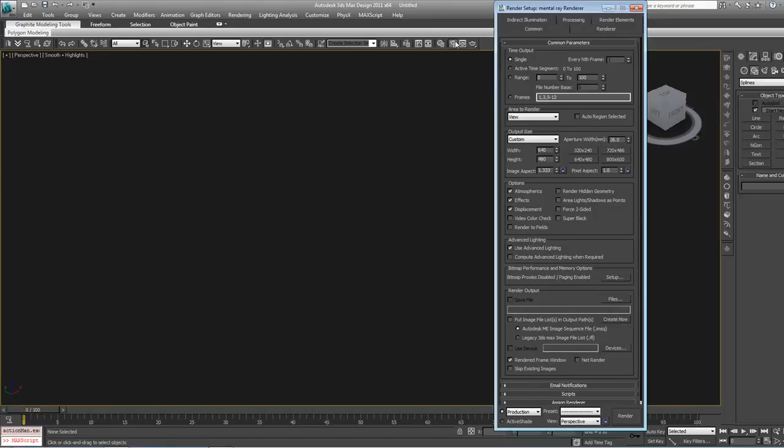One thing we need to do first, depending on your setup, if you already installed V-Ray, your renderer might be set to V-Ray here in the render setup button, assign renderer. For now, let's just make it the default scanline renderer. This comes with Max, so I know everybody has that.

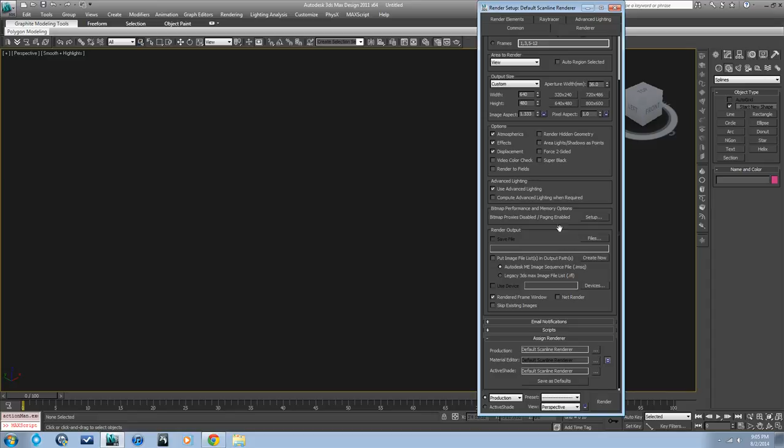For what we're about to do, it really doesn't matter what kind of material we're using. So if you take a standard material, make sure it's set to standard here. You can click on it, and it'll give you all your different options. Standard is the most basic, and again, everyone should have that.

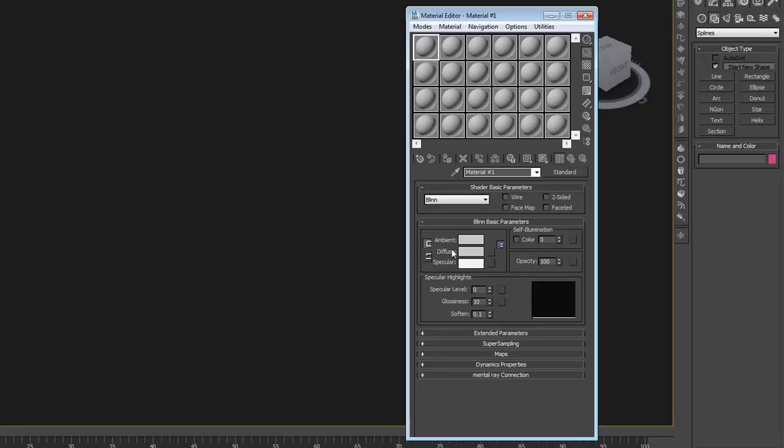Now, I don't want to go into a deep lesson about materials yet because we'll get to that later. But just follow me. In the diffuse slot, click on it, go to Maps, Standard, Bitmap.

I've navigated to the folder where I have my sketch saved. If I just click on it like that, it brings it in. Now if we double click on the material slot, you'll see my sketch there. This is a swatch of our material. By the way, I've saved this sketch with the supplemental materials for this lecture, so you can download it as well and follow right along with me.

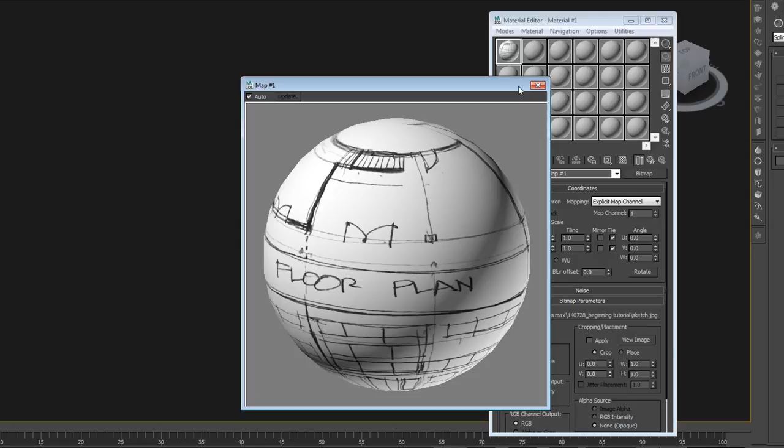Inside this bitmap that I've placed in the diffuse slot, you can view the image like that. Like I said, I drew this pretty quick, not my best sketch ever, clearly. Then we will make sure use real world is off, set it to tiling 1 and 1, and we'll see what that does in just a second. Okay, let's close this for now.

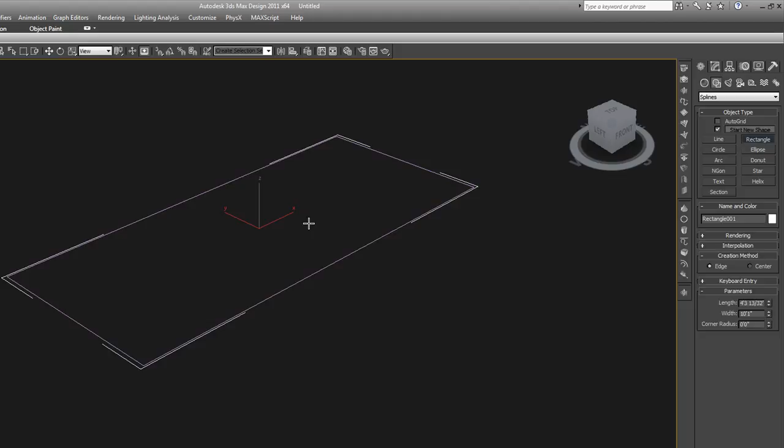Let's draw a little rectangle. And let's right click, convert to edit poly. Is that what we want to do? Yeah, that'll work. Now if we go back into our materials, hit the material editor button on our main toolbar, and with this polygon selected, hit this button here, assign material to selection.

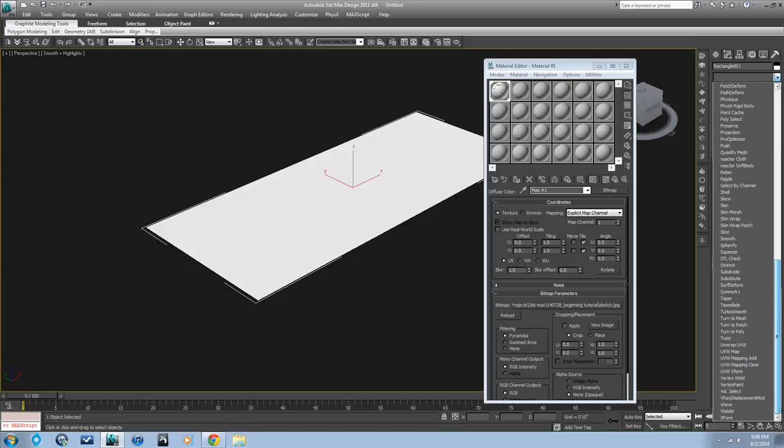Boom. Now also in the bitmap, this is our overall material. We go inside this bitmap here, and if you click this button, show standard map in viewport, that means it'll show up on our object. If we put this material on this object, it'll show this particular bitmap. But we've got to map it first. So let's hit our UVW map modifier, or go up to the modifier list in the modifier tab, UVW map, and now you can see it showing up.

Let's tumble around a bit. Okay, we can close this down and let's go to the top view so we're looking directly at it. As you can see, this looks a little too blurry.

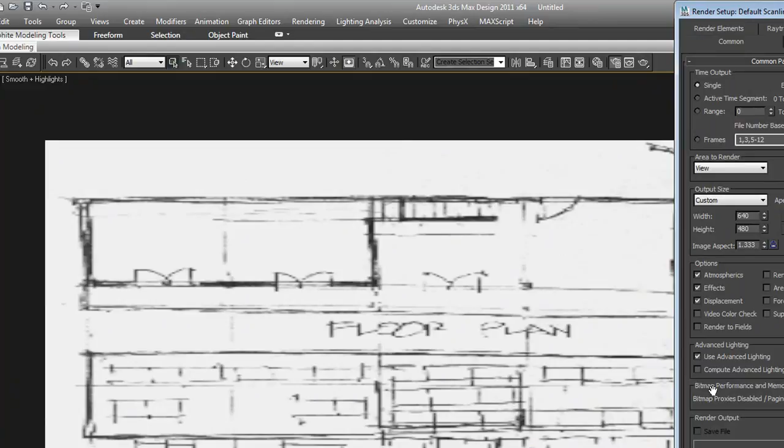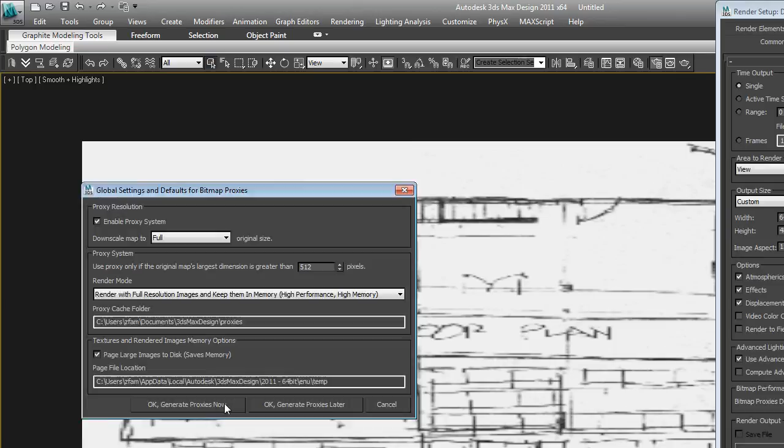So one thing we need to do is go into render setup again, and there's something here called bitmap proxies. If you go to the common tab and go to setup of the bitmap proxies, you can enable the proxy system, make it full of the original size of the bitmap. And then that makes it display at full resolution.

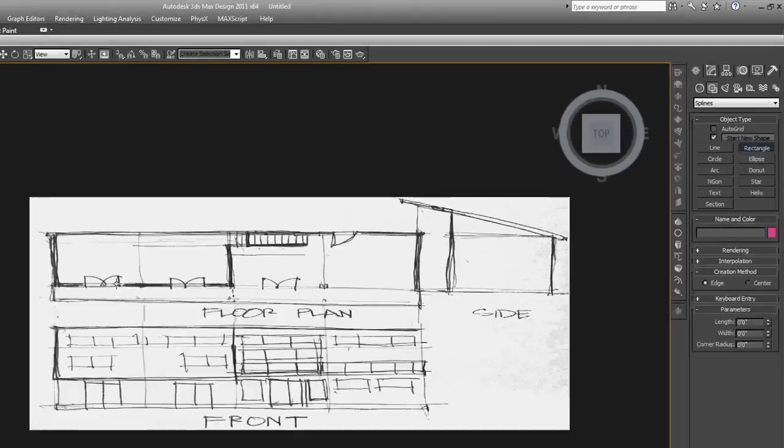Okay, now when you have a sketch like this, you need to make sure that you have something to base your scale on. Since I did this sketch myself, I know that I want each one of these modules of my house—this is the floor plan. Hopefully this will make a little more sense as we go along, because it's not a great sketch, but I did it fast for the purposes of demonstration, and it will show us that you can use almost anything to draw to help as a guide. So I want 20 feet by 20 feet.

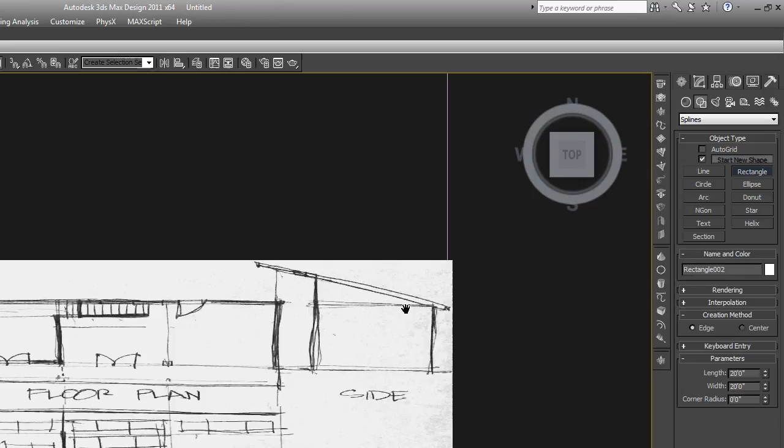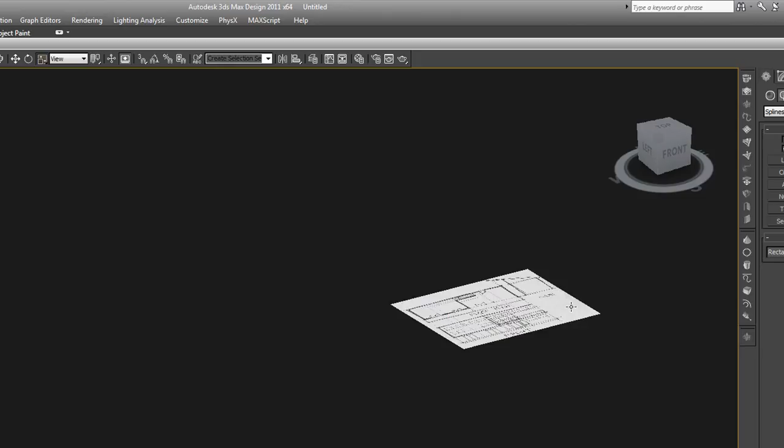Now I can scale this so that one of those sections I have ends up becoming 20 feet by 20 feet. Now, one thing you need to do is make sure that—let's move this down in the z-axis so that my rectangle is in front of it. That way we'll always make sure and see the rectangle. You can kind of see it there.

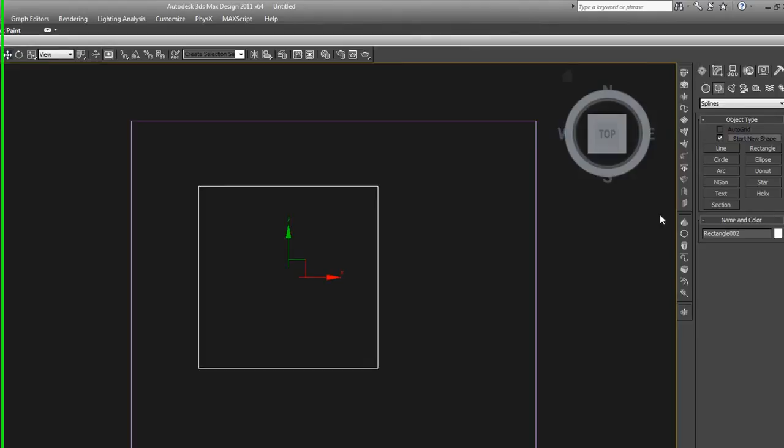And actually, I hit F3 just now to turn off the shading. If I select this rectangle, let's enable it in renderer—just go into the modify tab, enable in renderer, enable in viewport. Let's make it really thick so we can always see it for sure. Now go back into shaded mode, and there you go.

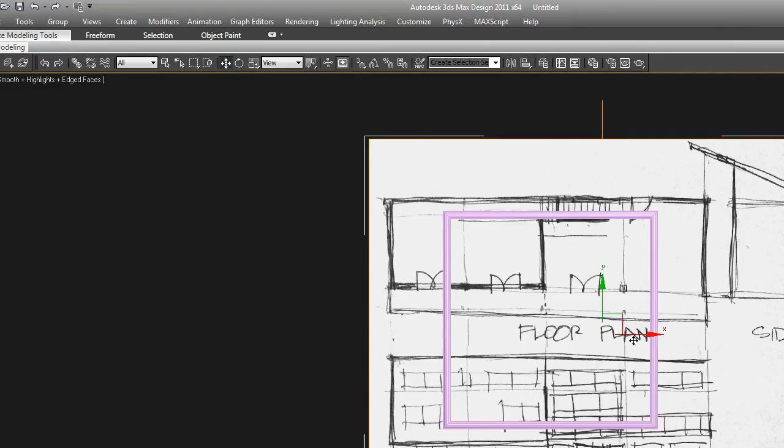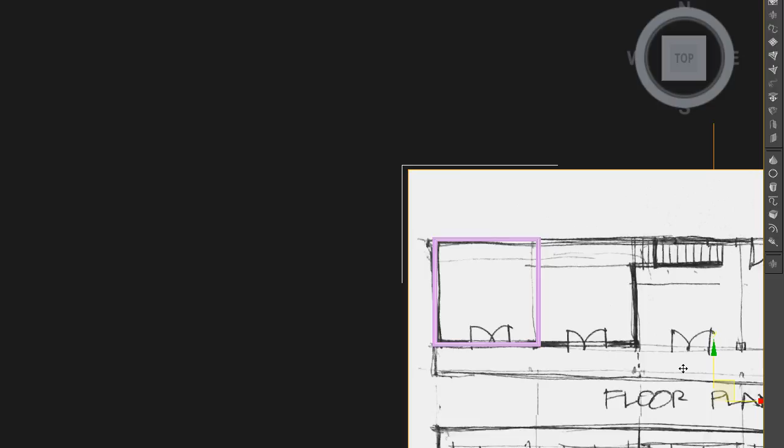Now we move this into place here, and let's just keep scaling it until it fits. One thing we can do here—that's about right there. Now we need to scale it in this direction. That's almost it right there. Okay, so I've got my 20 by 20 squares. So this thing is kind of all scaled now.

Okay, so I now have a floor plan that's to scale. Now, how are we going to get the elevation? Well, we can...

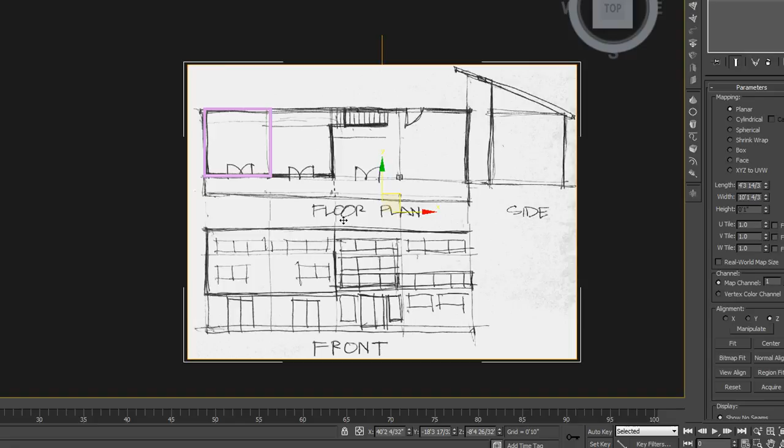One thing we can do, since this is an edit poly, is we can go in. Now, what I want to do here is still show that image with the mapping, even though I'm going to edit the poly. So I can hit show end result on off, which basically applies this modifier even though you're down here in the edit poly.

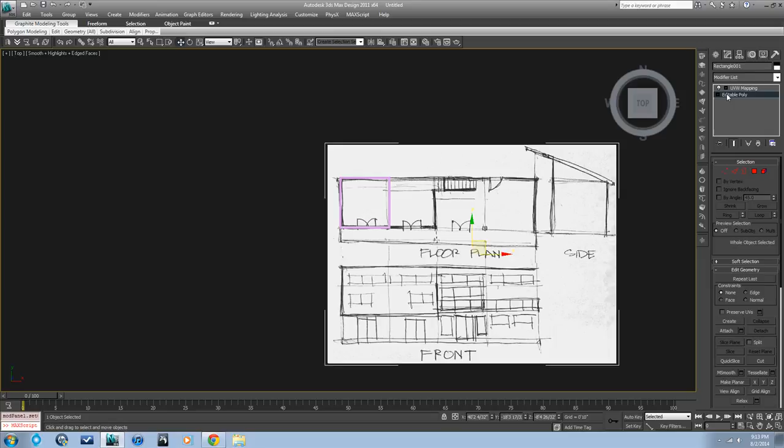You can take this now, take the vertices and move them up, just like that. Take these vertices, move them over, because we don't need that.

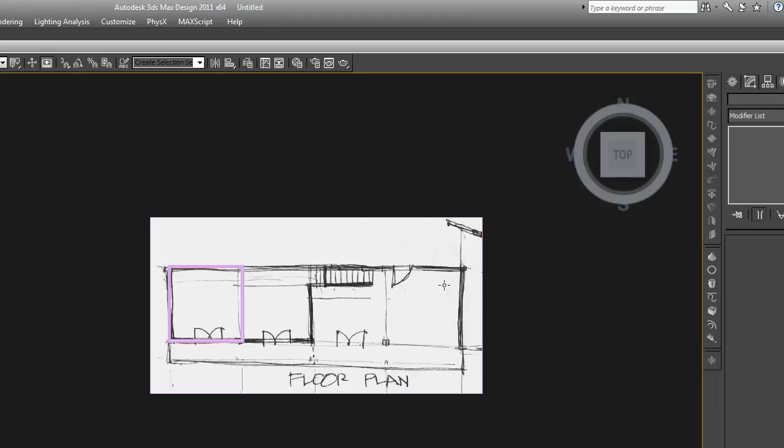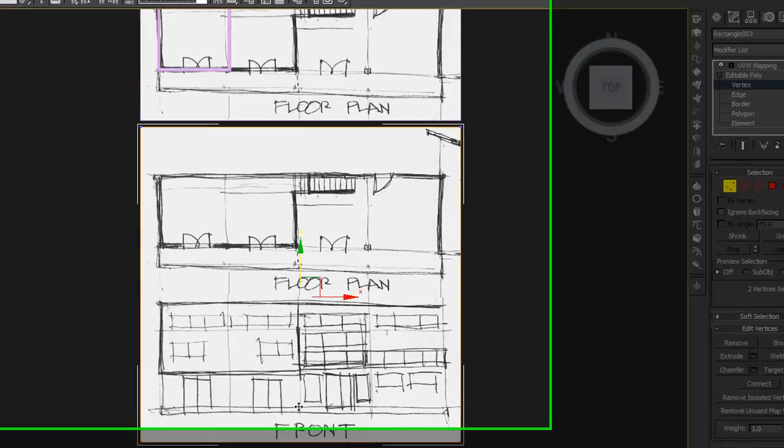Now if we copy this, let's go into here and again show end result, and let's get just that front elevation there. Just like that. Now we have a nice front elevation.

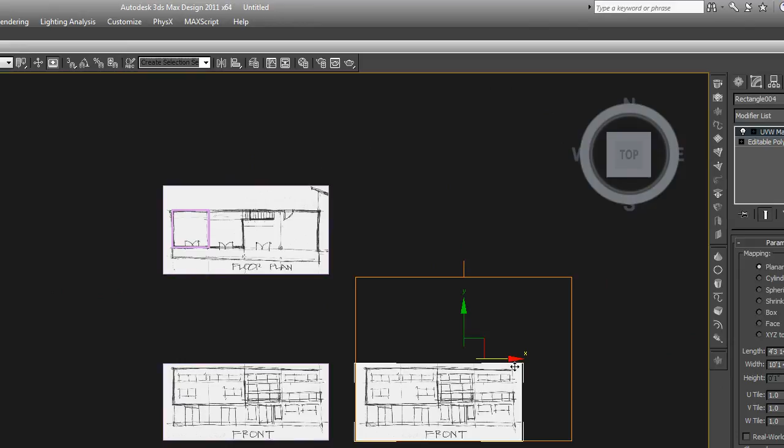Let's copy it again. And because we're keeping that same UVW map on there, everything's remaining at the same scale as the original one. So let's go into here, show end result, and we want to expose that—we've gone too far over there—expose that side elevation. You probably couldn't even tell it was a side elevation, but that's what it's supposed to be.

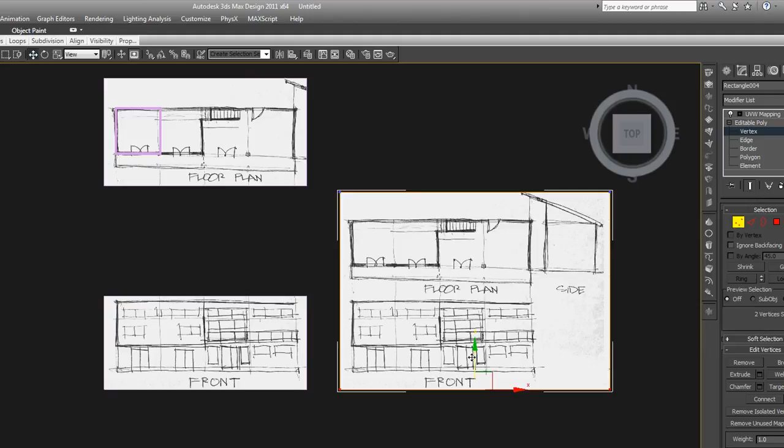Now everything's going to be to scale here. So this is one way of doing it. There's a lot of ways of doing it, but the thing is, you got to make sure that everything is the same scale. Then you can line them all up and draw to it.

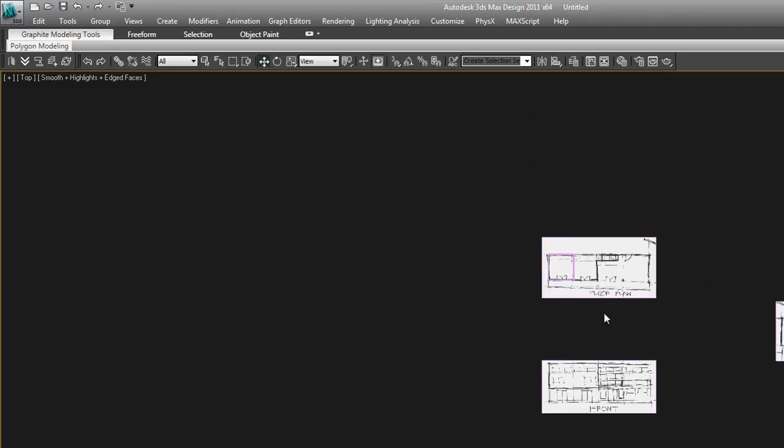Now, if you were going to do CAD, you do the exact same thing, but what you do is import file. Let me navigate and see if I've got some good CAD to bring in. Okay, I have this CAD drawing, and I went to import and find a DWG file, and let's see what happens when it comes in.

One thing that's important when you're dealing with CAD is to make sure you take out all the blocks and all the hatches and any information you don't need, because it bogs down 3D Studio Max really bad. So you want to make it as efficient as possible. You can see it already taking a long time importing.

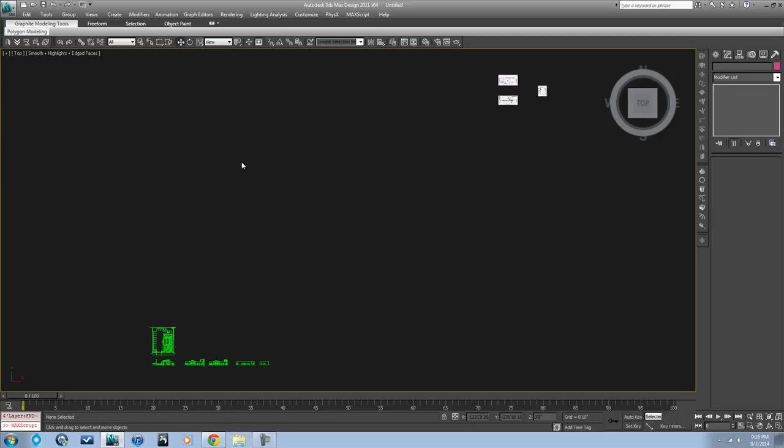Okay, I hit OK when it was importing, and I just used the defaults. And here you can see these come in basically as splines. See, that's an editable spline. You won't want to edit it at all. You're just using it to draw to.

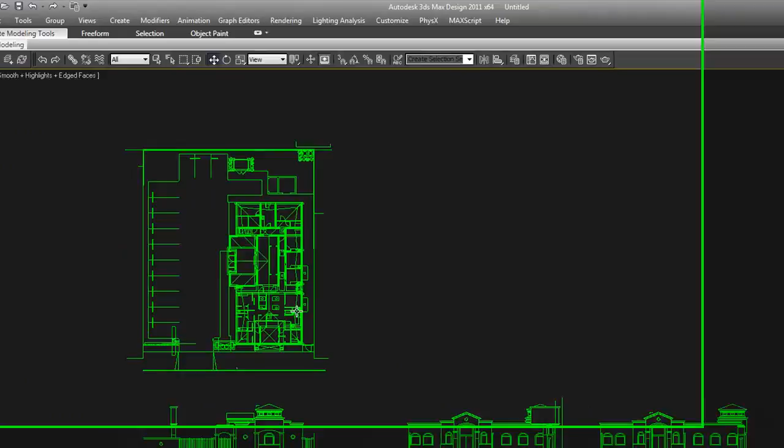Now the nice thing with CAD, of course, is that you can snap to it. So what I usually do is bring this in, put it on a frozen layer. This floor plan you can put down, so you can draw on top of it. So let me just show you as an example.

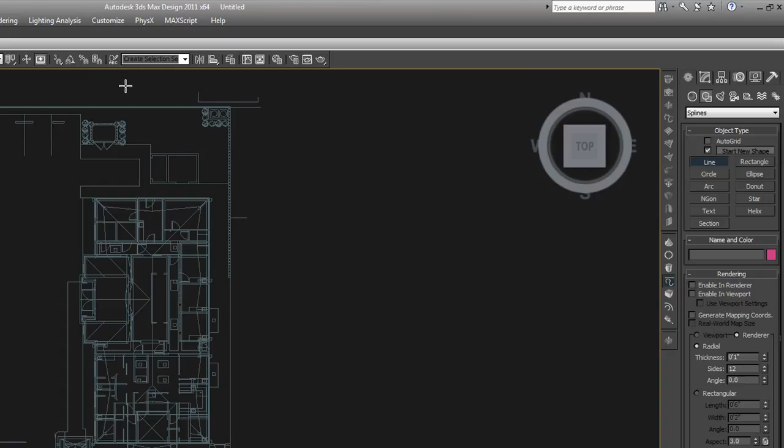Let's just freeze this individually. Freeze selection. Now you can take this, go to lines, go to 2.5 snap. Quickly I'll explain: 2.5 snap will be drawing on a Z of 0, but it'll be snapping to this floor plan even though it's below Z of 0.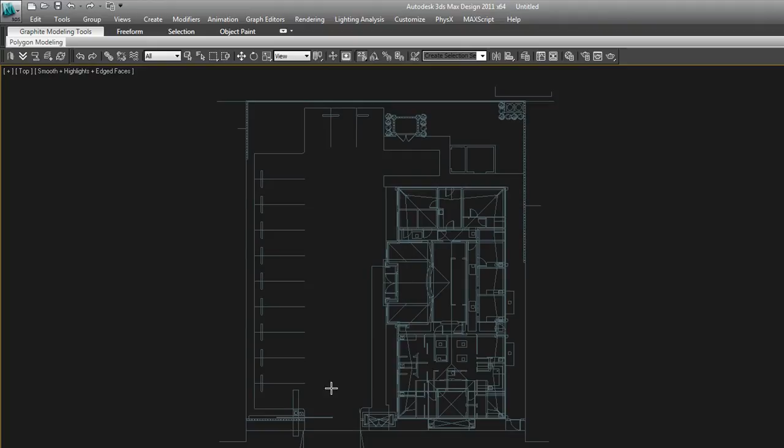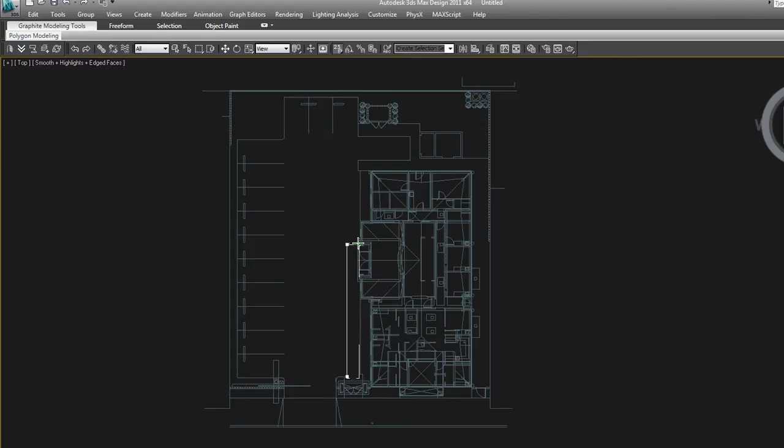It's at negative 47.6, so it's down below, but we'll be drawing on the 0 plane. And if you right click on your snaps, you can go to what you want to snap to. If you're snapping to CAD, you always snap to a vertex. That's what all these little points are on this thing.

And then you can just draw right onto, well, trace right over your CAD. So CAD is the nicest thing to use because you can draw right onto it. And you can see this was drawn at the 0 plane up here, and the CAD remains down there so they don't get in each other's way.

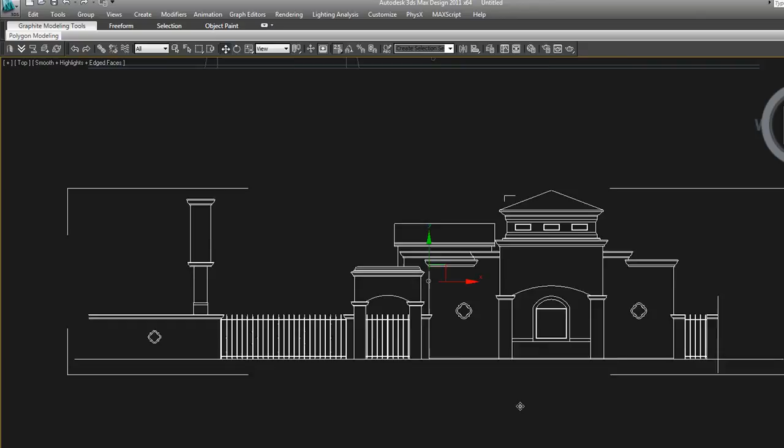And obviously you can take this elevation, set it up like this. You can take it and rotate it 90 degrees. This is where the snap would be nice.

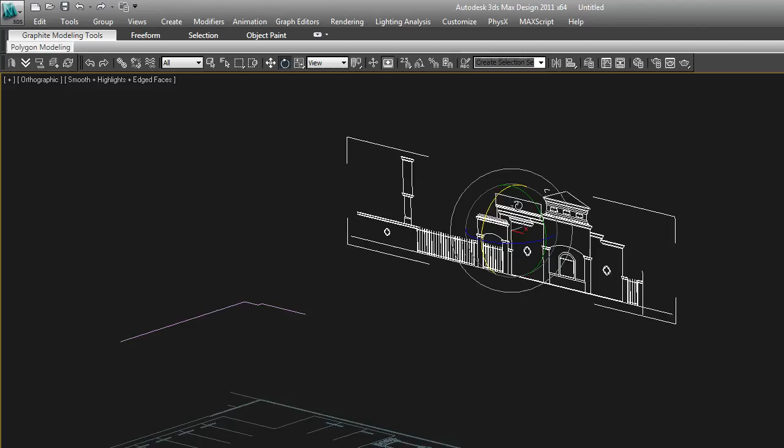Can't get it. Rotate along the x-axis 90, or was it negative 90? Nope. Undo.

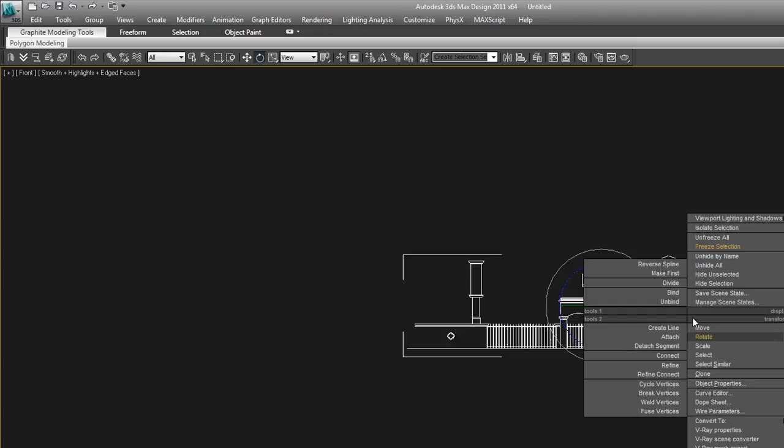Okay, now you have a front elevation that when you go to the front view you can draw right to again. You want to make sure that it's behind, it's at less than 0 in the y-axis here, so that when you draw—I'll show you again—freeze selection.

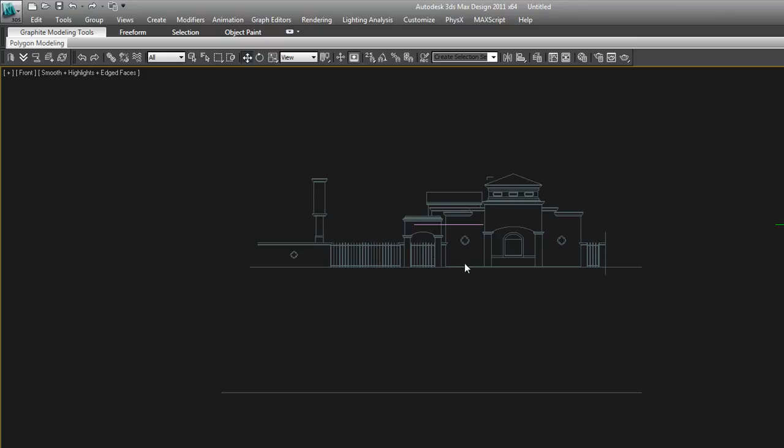Okay, we're way over here now. And actually, you want to set this up so that the ground plane is right where we were drawing the ground before, right there. So that ground plane is at 0. Freeze it again. And then you can just start outlining all this stuff.

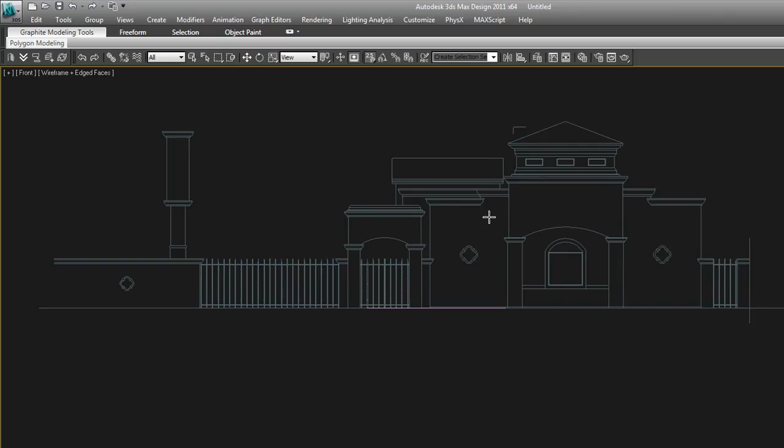Snapping to all the vertices. Oh, that's a bad one there. Okay.

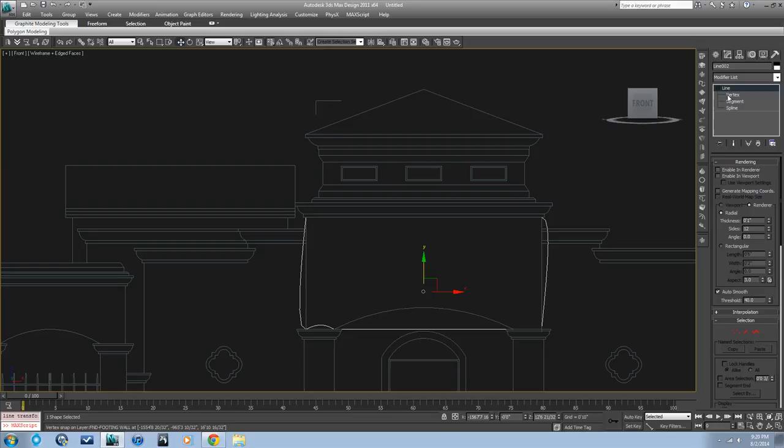Now what I would do is right click, go into vertices mode, select all these, make them corners like we've done before, and then take these two and make them Bezier corners, and then start adjusting, right, so that it's matching that.

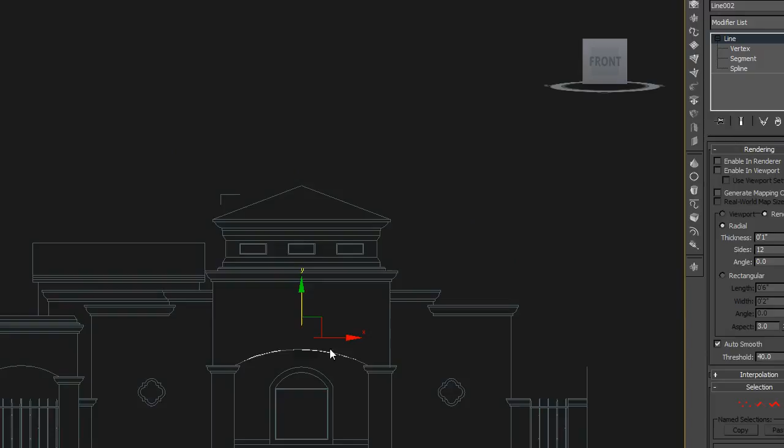And you can see, okay, something's not right there. So this is what I was talking about. You want to make sure that this is back here behind where you're drawing in the front mode. That way you can always see it in front of that.

So then if you extruded this, you know, that'd probably be like an 8-inch thick wall. And there you go. There's your first wall. So you can see CAD is nice and clean. You can snap right to it.

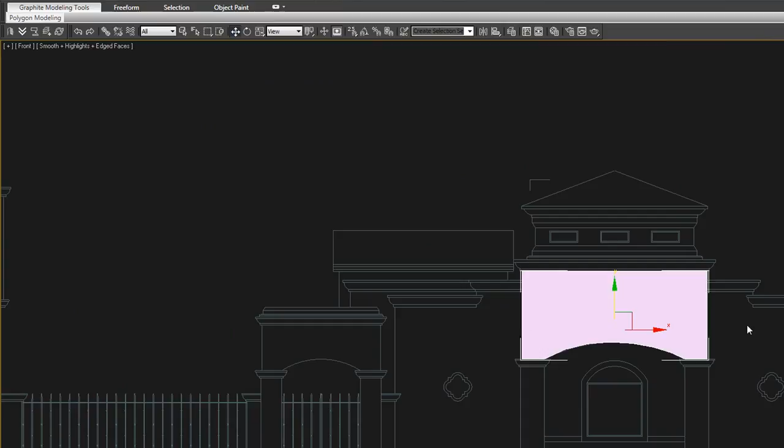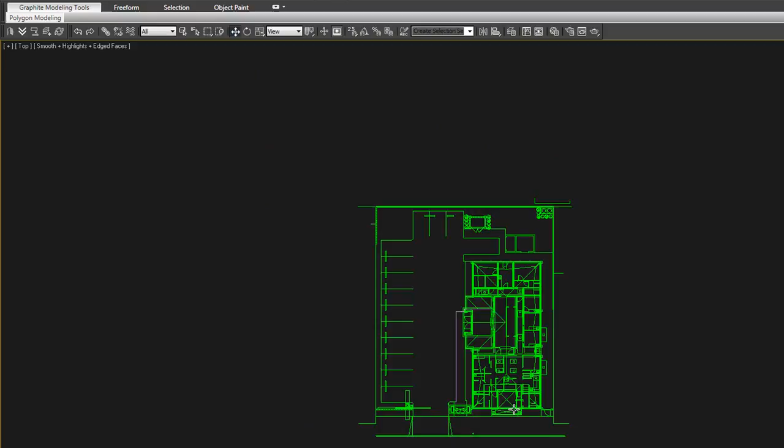And then you just have to do put elevations on all sides and draw to them, and then just line them all up on this floor plan, so that wall I just drew I would bring right up to there, because that's where it matches on the floor plan. And eventually, as you start building all the elements of these things, you have a building that appears.

But like I said, we're going to use the sketch, so in the next video I'm going to put that together for you and we'll move forward from there.